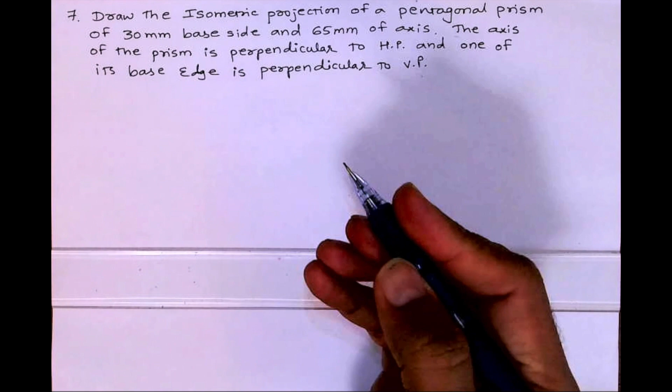Welcome to Technical Drawing. Today we'll draw the isometric projection of a pentagonal prism of side 30 mm and axis height 65 mm. The axis of the prism is perpendicular to HP and one of its base edges perpendicular to VP. So when axis is perpendicular to HP, the top view will give you the true shape.

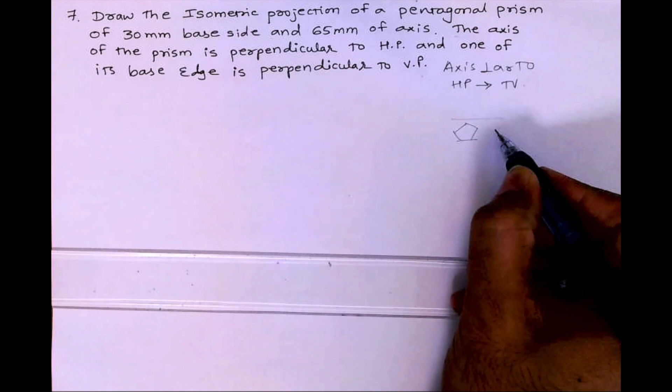So we'll draw the pentagon in top view. It can be this way or this way, but we are not considering inclined right now. If you read, one of the base edges is perpendicular to VP, so this one. This is our helping figure. In 3D, this is HP, VP, and the pentagonal prism is resting like this. So one of the base edges perpendicular to VP refers to this base edge.

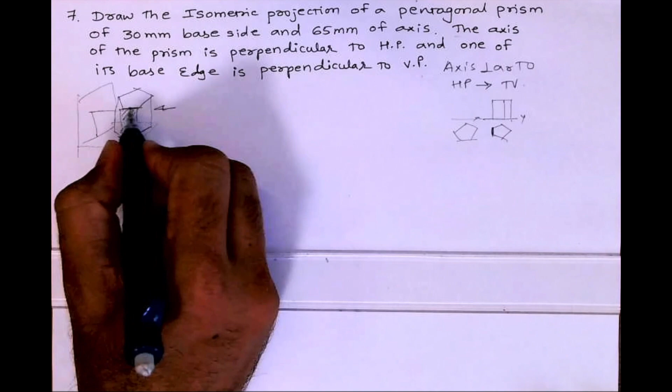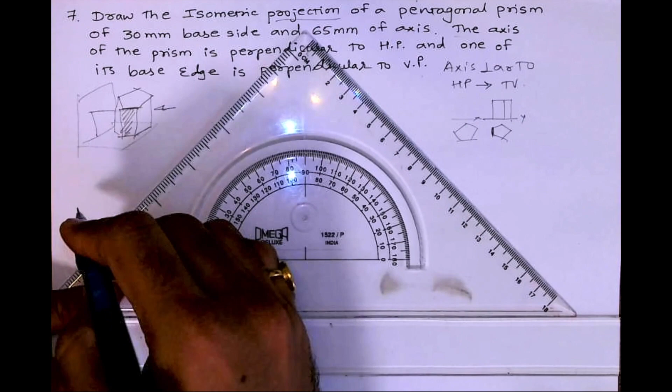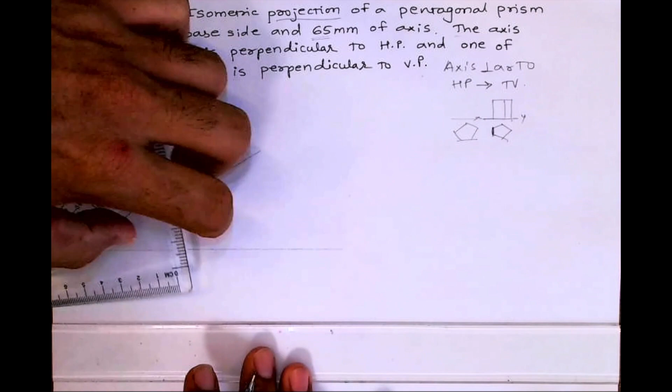It's an isometric projection, so first we will draw the scale. We'll draw 45, 30, and mark 70 on it because the maximum length is 65. On the 45-degree scale I will mark 70, and on the 30-degree line I will project all these points.

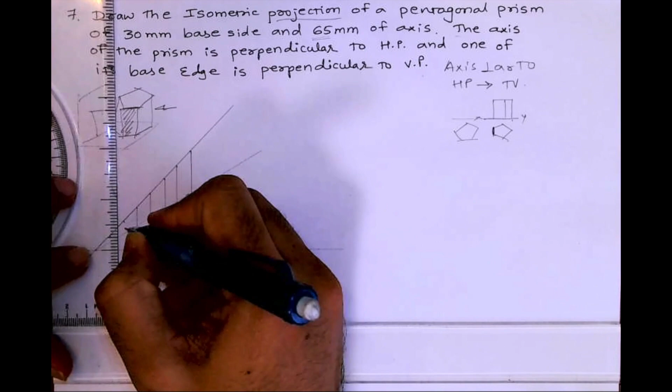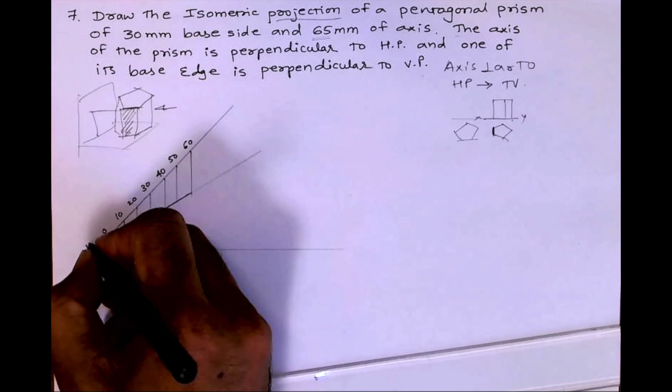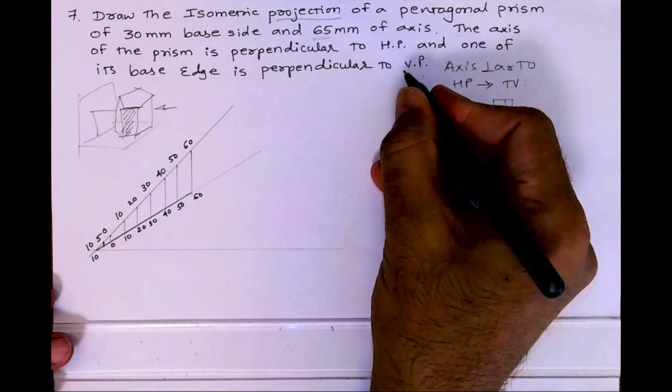This is 0, 10, 20, 30, 40, 50, 60, and this is 10. I'll mark 5 over here. I will draw a vertical line: 0, 10, 20, 30, 40, 50, 60, and this is 10. Now the side is 30 mm, so 0 to 30, and for 65 we will take 60 and 5, making 65.

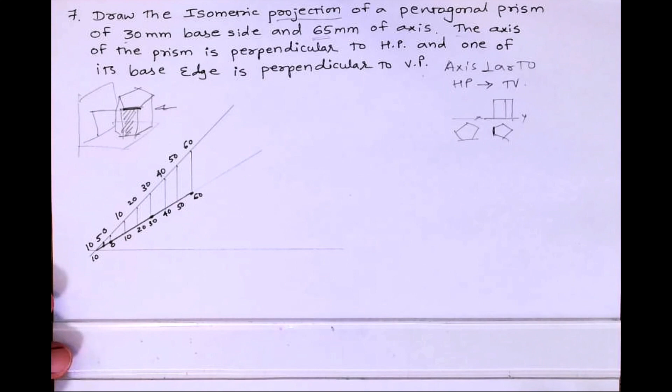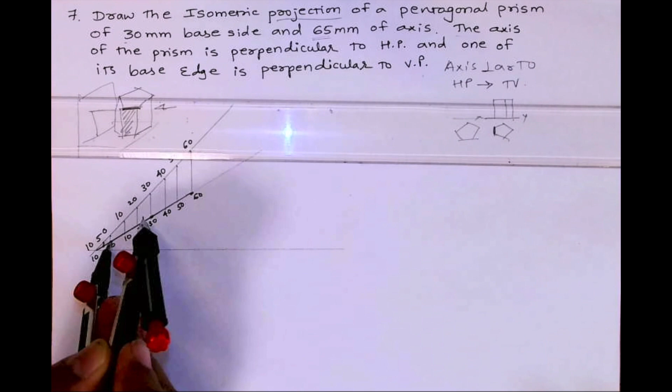Now first we need to draw the pentagon, so I will draw the pentagon. You can draw a pentagon by any method, but make sure the line is vertical because that edge is perpendicular to VP. So I'll take the distance 30 and cut it.

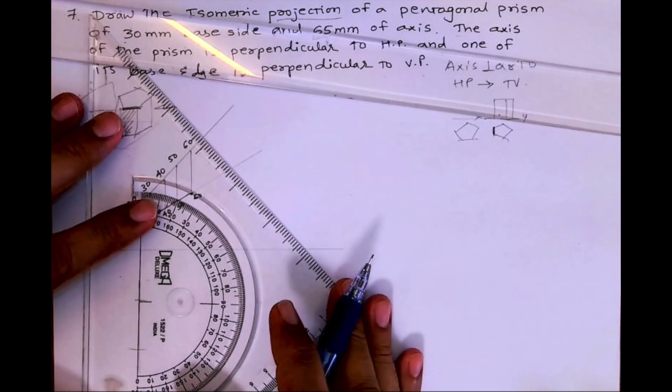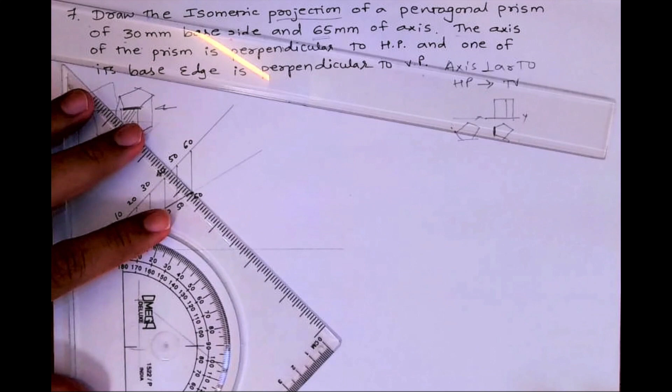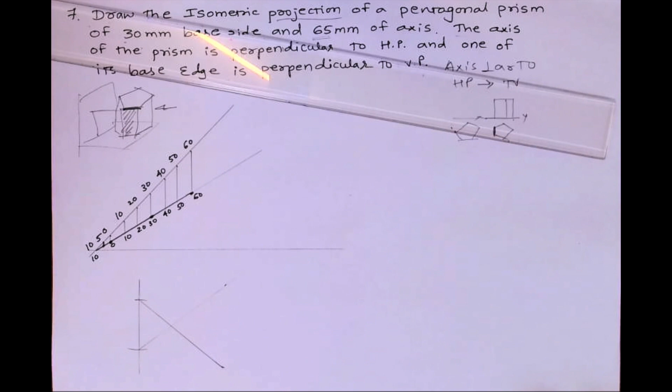Then I will take 54 degrees with a protractor and find the center. I'm marking 54, so this angle is 54. Again I'll mark 54. So wherever it cuts from that point, to this distance, center to that point, we can draw a circle.

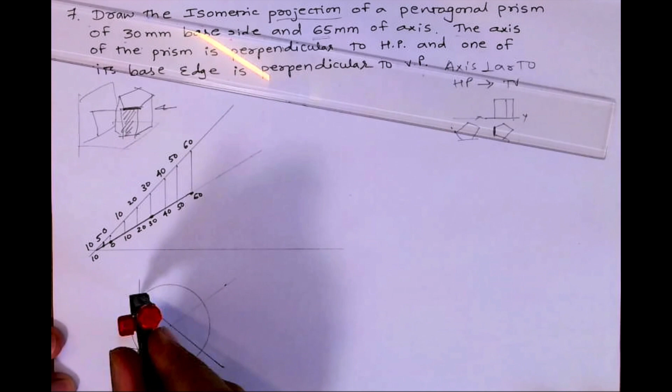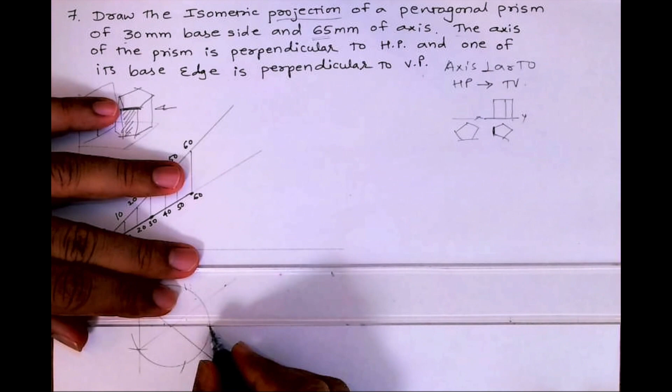Then we'll take the side. Always remember, in a pentagon we take the side. In all polygons we take the side and cut on both sides, and for the center we'll extend from here to get an accurate pentagon. You can cut it from those two sides also. So this is how you get the pentagon.

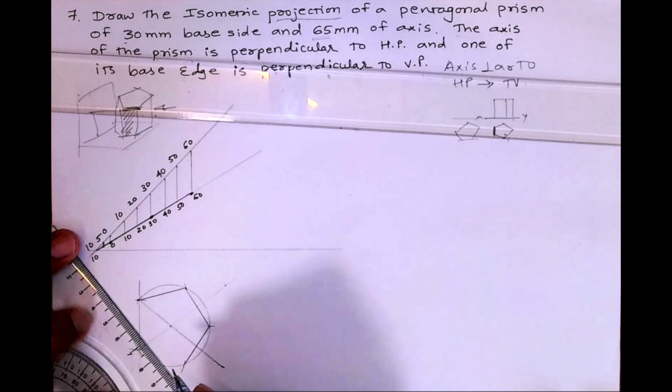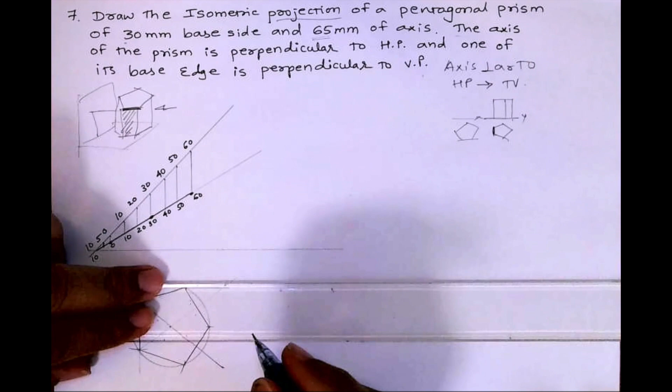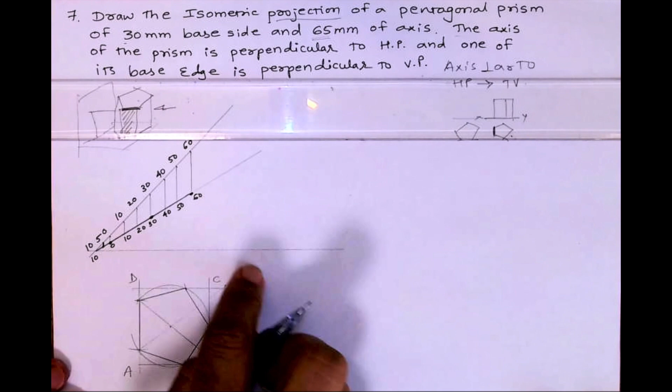Once you've got the pentagon, we'll convert this into a rectangle ABCD. Always remember, whenever doing an isometric projection, convert this into a box ABCD and always draw the box first, then mark the internal points. The axis is O, and if you want, you can label the points as 1, 2, 3, 4, 5.

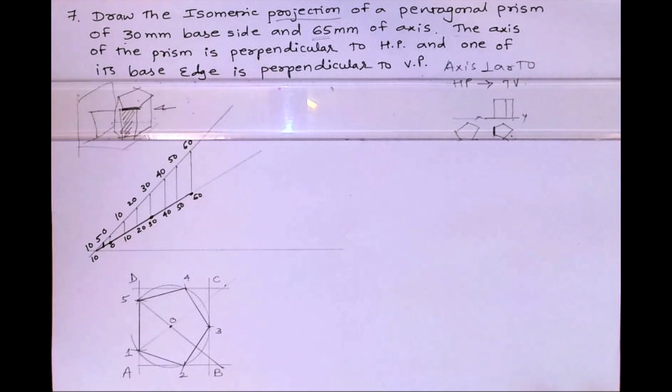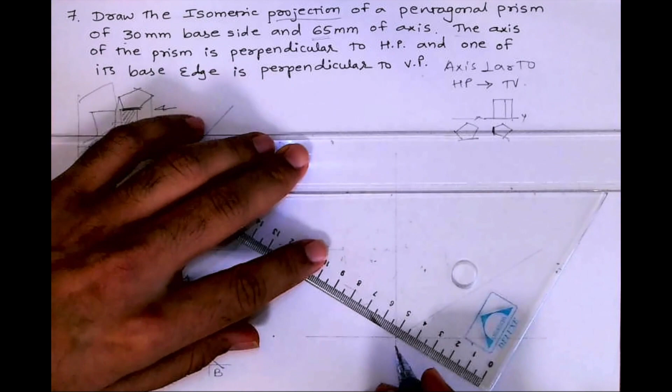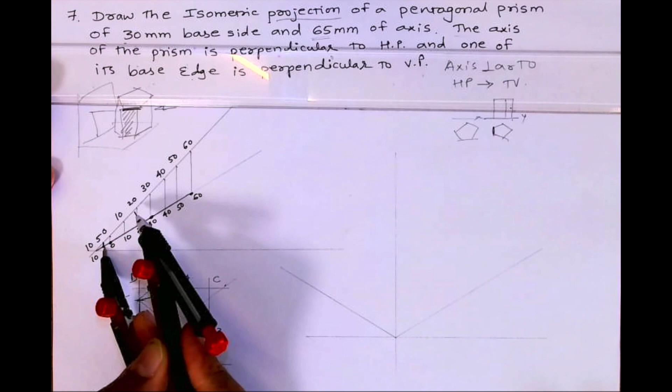Now we'll draw 30 degrees. After that, I will take the height 65. Always remember, take it from the 30-degree angle. And again I will draw 30 degrees.

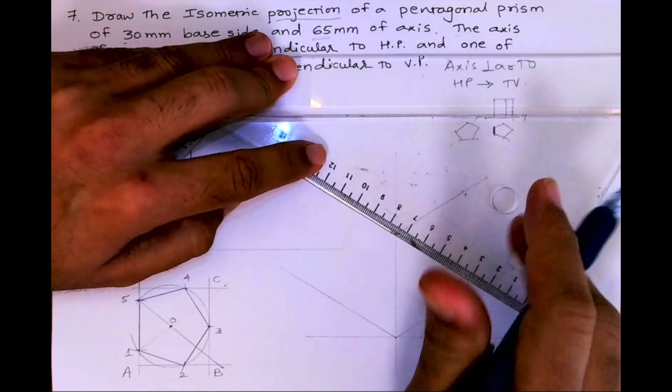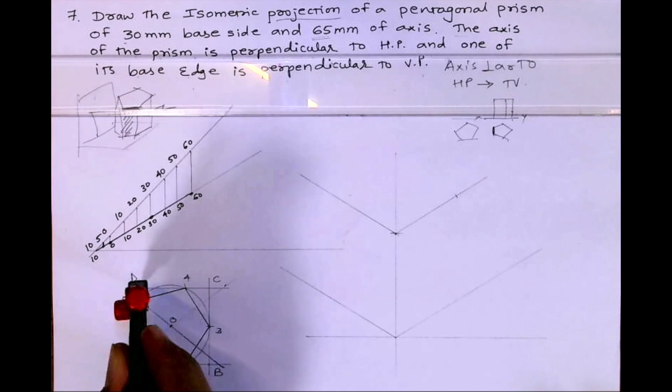Now you take A to B, and from A you cut it on this side. You take A to D and cut it on this side. I'm just checking A to B again. This is A, B, D.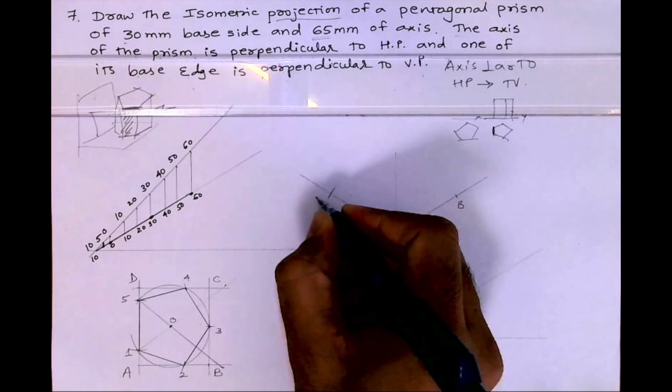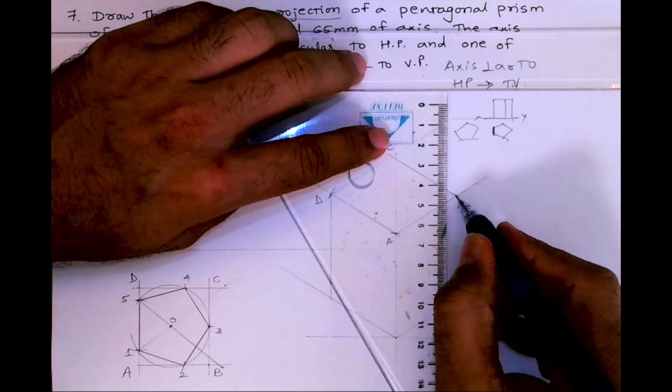Now we need to draw C, so again we'll draw a parallel line. From D we'll draw a line, and from B we'll draw a line, so we'll get C. After that we'll draw a vertical line. So this is A, B, C, D.

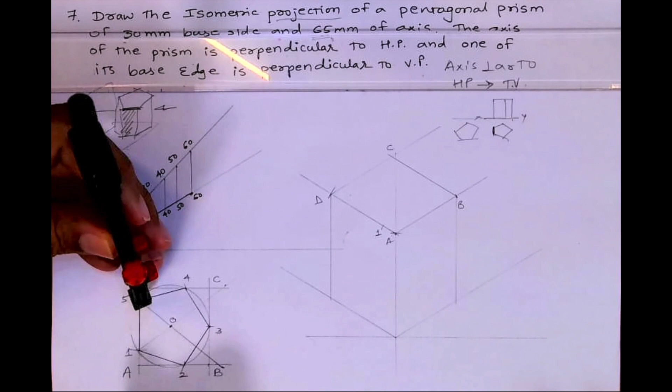Then we'll mark A to 1, and we'll cut it over here. Then we'll take D to 5. A to 1, cut from A; D to 5, cut from D.

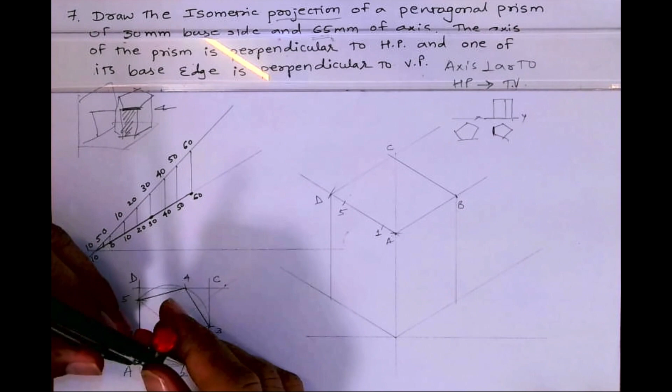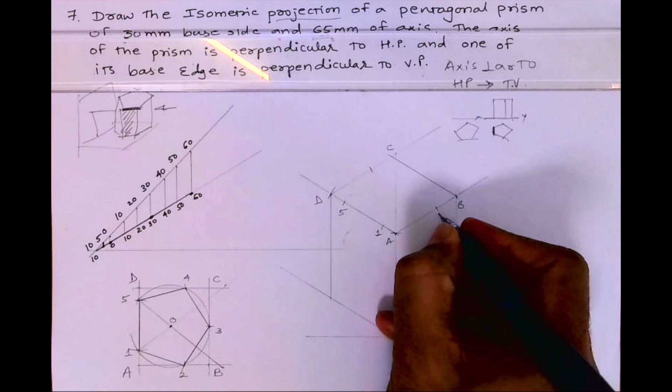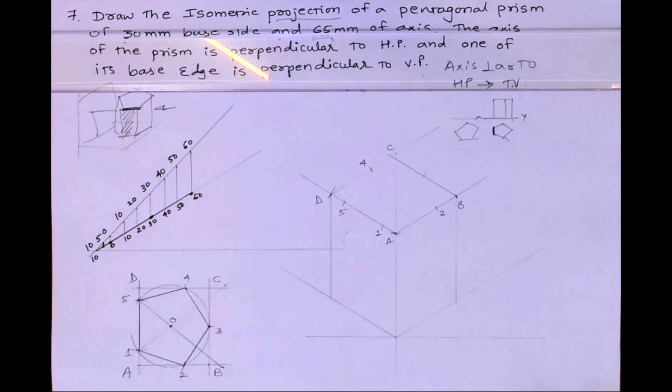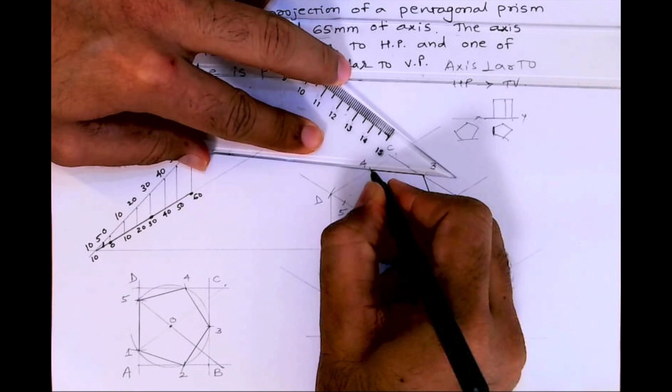Then you take A to 2, and D to 4. The same way we can take B to 3, cutting from here, and you'll get point 3. Then we join 2 to 3, 3 to 4, 4 to 5, 2 to 1, and 1 to 5.

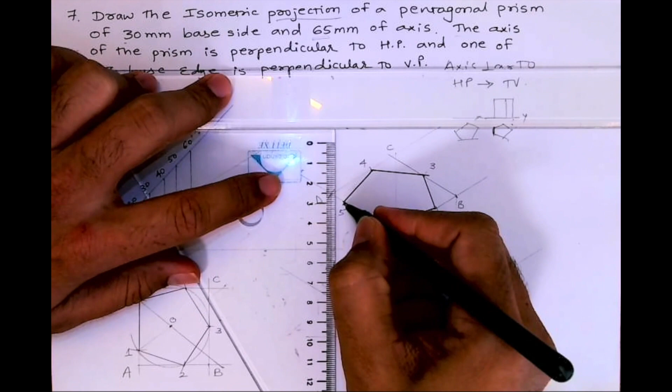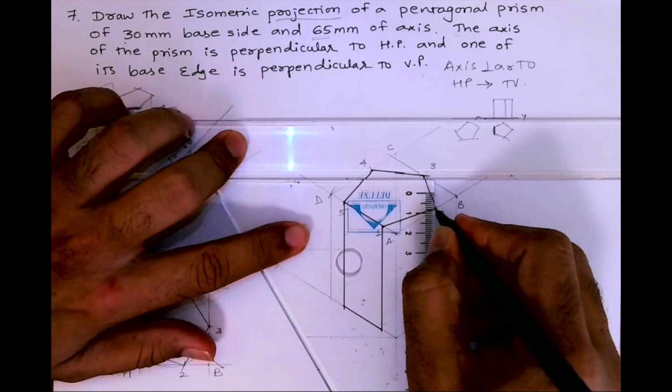So we'll get the pentagon. Now whatever is there on the top side, the same thing will be repeated down below because it's a prism, so you go down by the height and draw all these sides. So you'll get the pentagon. The behind portion we can't see, so we are not drawing it. We generally don't draw dotted lines in isometric projection.

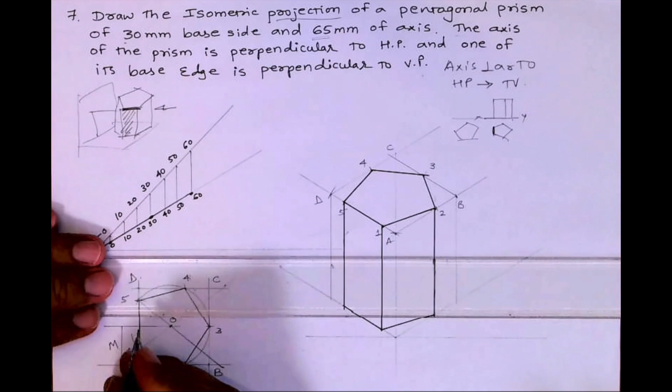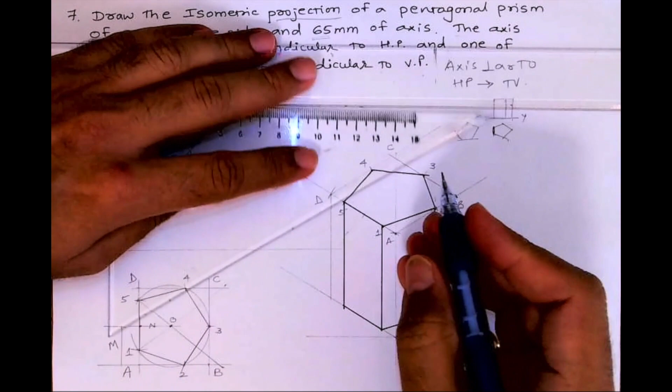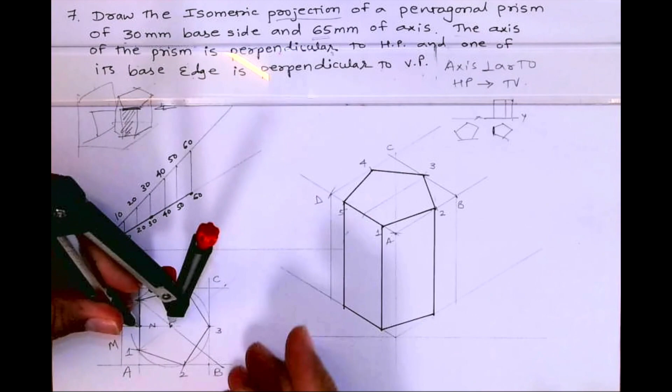Now we need to mark the axis, so for the axis we need to mark M and N. This is M and this is N. So what I will do is take the distance from A to this point and cut from here, then draw a line from there. Now this distance is N, so take that distance and cut here. So you'll get the axis, that is point O, and you can take this point down by the height to draw the axis.

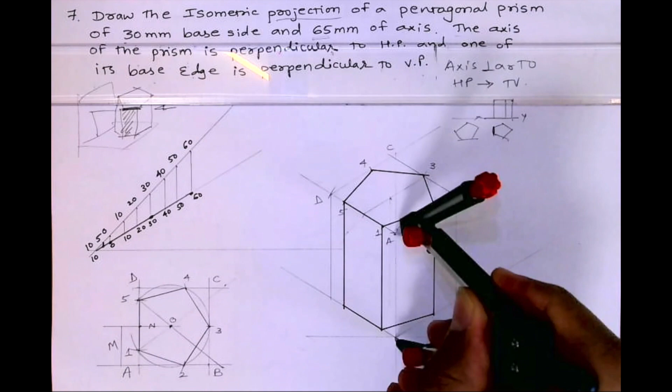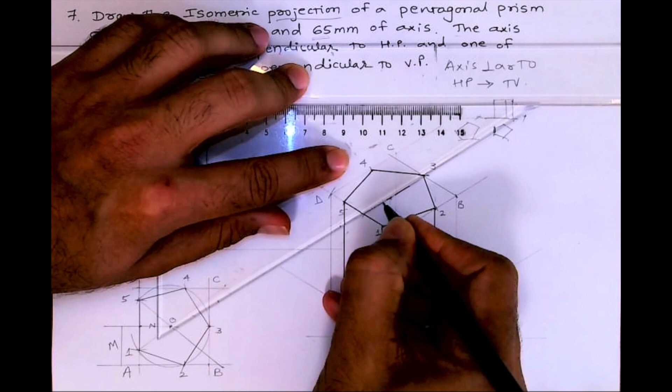So we can draw the axis. This way we have completed this sum. This is a CBSE portion, engineering graphics, where we are doing sum number 7 from the first chapter.

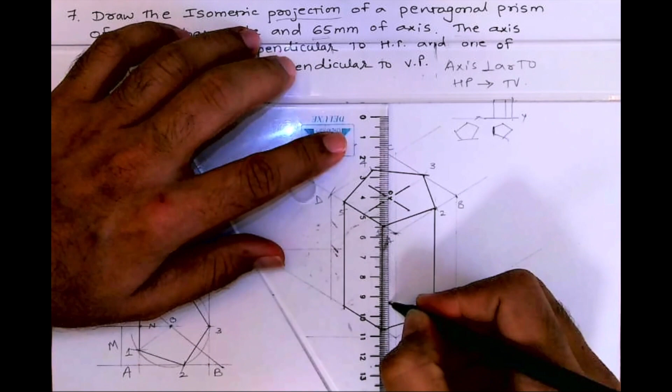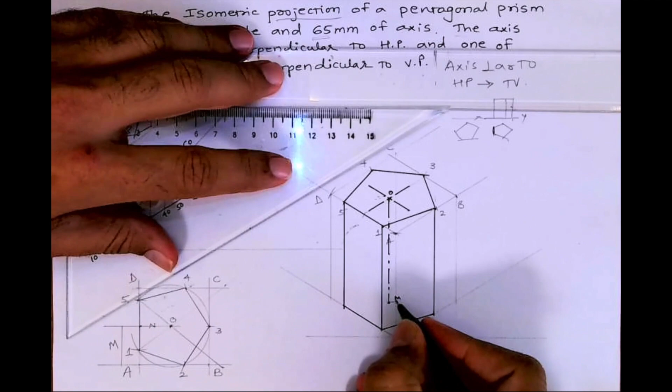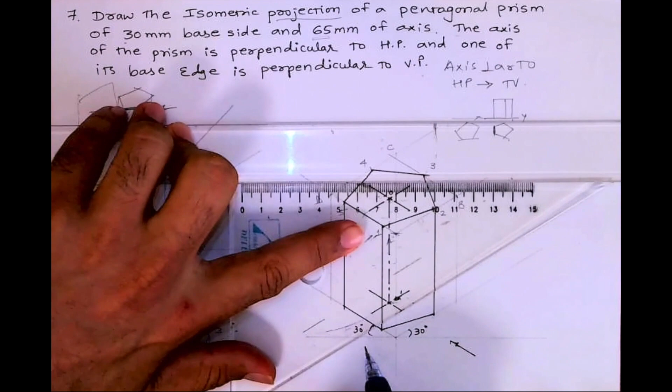We can write this as O dash, O dash being the axis. After that we can show the direction of viewing and dimensioning, and we can write origin and 30 degree also. So this way we have completed this isometric projection of a pentagonal prism. I hope you people have understood this. Thank you.